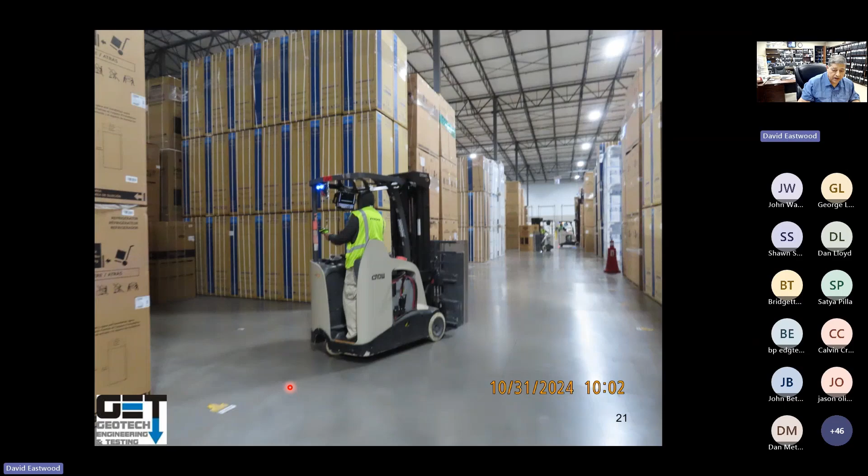But they have loading ramps in addition to their buildings and parking lots, truck wheel parking lots. They've got big parking facilities subject to 18-wheeler loading and a lot of heavy traffic. The interior of them, you've got all kinds of stuff in there - shelving, boxes, forklifts picking up heavy stuff and carrying it, running around.

Typical construction sequence: of course you do the earthwork, the mass grading, remove the grass, weeds and trees, root raking, take out all the roots, start grading it. If you're doing moisture conditioning, you go in there, add water to the soil as you put it back in, compact it to get it wet up to the optimum. That's how you do the moisture conditioning for these things.

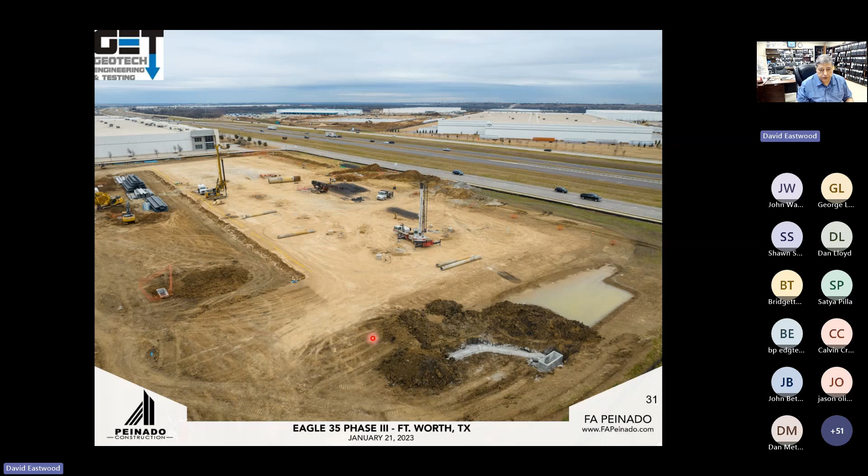You dig out the detention pond and put them on these pads, then go out there and start drilling your piers. You go out and start putting your slab together, put the steel and vapor barrier in after you build your pad. Then you start pouring your concrete in segments, pouring pour strips.

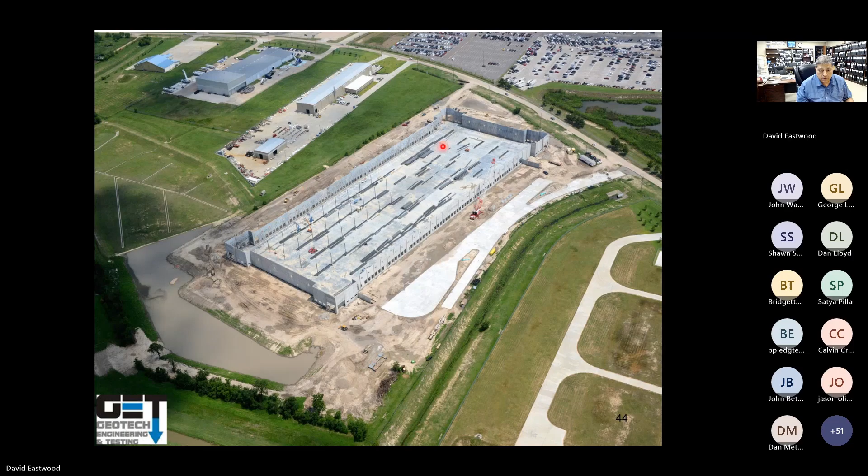Then you start forming your panels and getting your panels done. Then you start standing up the panels - you can see them standing up like that. Putting your columns in and your roof. Kind of how that goes. So, beautiful structures and very practical.

Design for paving. We do borings out there, typically for 1-story type structures in the Houston area. We do borings 25 feet deep for tilt wall buildings, if your soils are nice and strong. If they're bigger, multi-story type stuff, you'd go much deeper than that.

We use a truck mount rig, do the borings next to trees. Trees tell us the depth of the active zone by providing us with root fibers. Root fibers extend to the areas where there's no oxygen and water - that's where they die, and that kind of indicates the depth of our active zone. But that's not the movement active zone - they have an active zone and a movement active zone. Our active zone can be like 25 feet deep in Houston, but your movement active zone is only 10 feet.

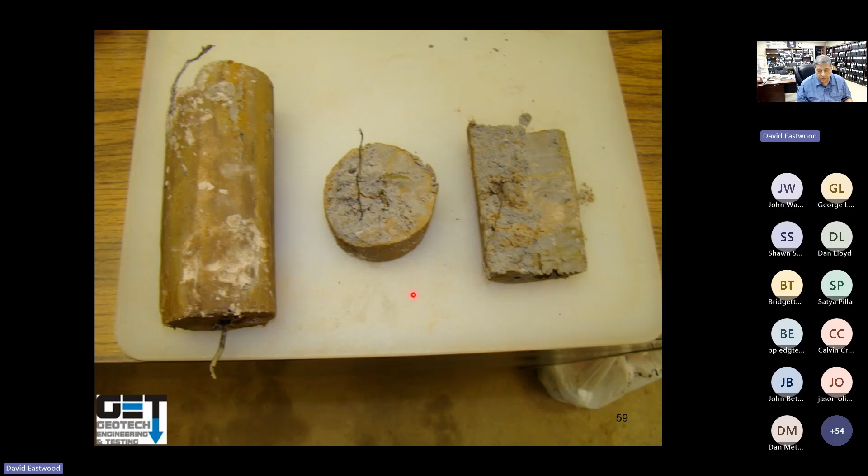These are root fibers - as you go deeper, they become smaller. You typically do one boring every 3,000 to 10,000 square feet, depending on the size of the building. Sometimes one every 20,000 square feet - if you've got a 1.2 million square foot building, you do less boring than that. In Houston, it's about 25 feet deep. In Dallas and San Antonio, you may have to go 35 feet deep.

Laboratory testing - you do all the standard testing, Atterberg limits. You put water in the soil and when it becomes liquid in this cup, you take a sample, put it in this cup, cut a groove through it with this thing, turn the handle 20 to 30 times.

When the groove comes close together, you take a sample of that. You get the wet weight of the soil. We want to know how much water is in the soil for it to behave liquid. You dry it up in the oven, get the dry weight of it, and get to measure how much water is in the soil. When it becomes liquid, you subtract the dry from wet.

Then run a plastic limit test. In this test, we take the soil, roll it to 1/8 of an inch. You get the wet weight of it, put it in the oven and dry it up. You want to know how much water is in the soil for it to behave semi-plastic.

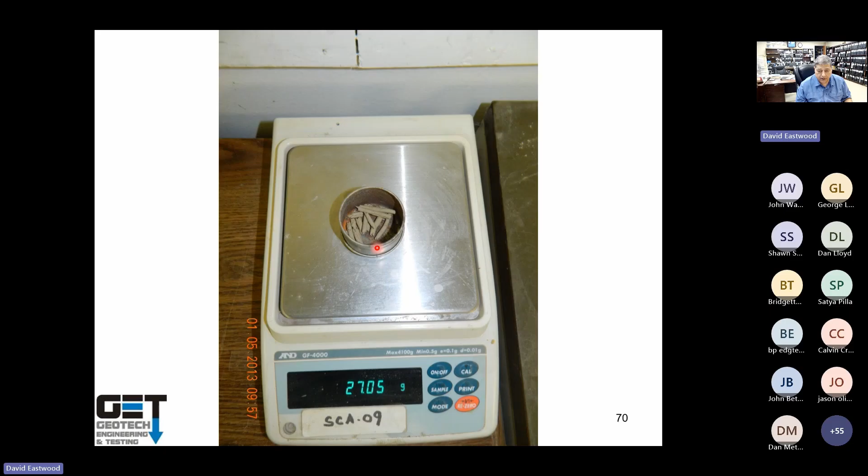When you subtract plastic limit from liquid limit, you get the plasticity index, or PI. If you've got a project with a PI less than 20, you've got low swell potential. Between 20 and 30, it's moderately expansive. Between 30 and 40, it's highly expansive. Above 40, very highly expansive.

A couple other tests we do in the lab: hand penetrometer and torvane. In a hand penetrometer, you push the hand penetrometer into the soil and you can read what kind of strength it has. In the torvane, you put it at the end of the sample and shear it in torsion, and you can read what kind of strength it has.

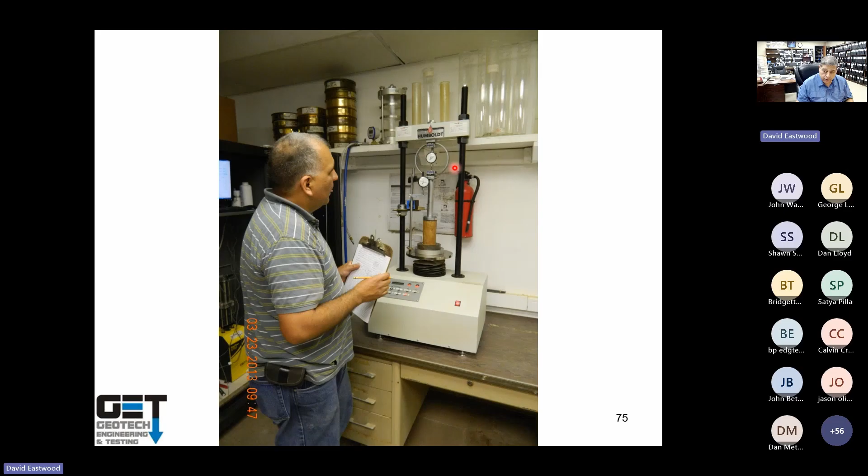You can also do an unconfined compression test. You can see the proving ring and the deflection, and you load up the soil to shear it, to see how much load it can carry. You use that for the design of your piers, spread footings, strip footings, or auger cast piles. Use this strength value for your foundation design.

One other test we do in the lab is called the swell test. You take a soil sample like this, put it in a ring, cut it and put it in this kind of assembly. This measures the deflection. You put load on it with this rack, equal to the geostatic stress, that's the load that's been in the ground. You add water to it.

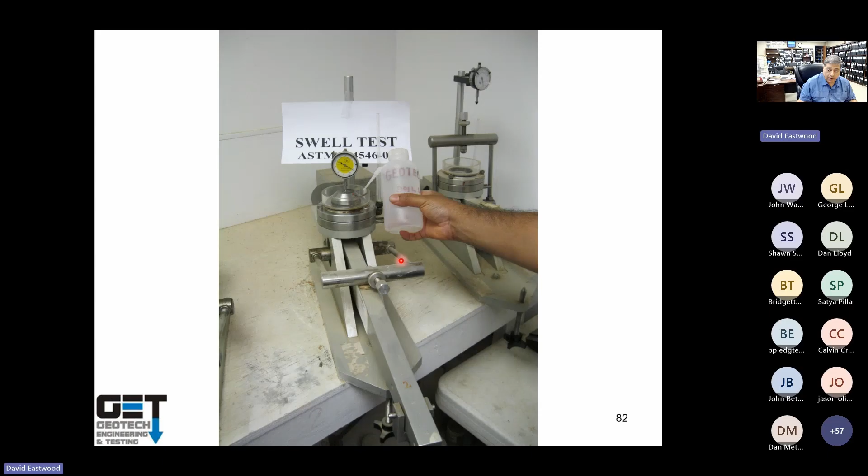And of course, you add the load. Basically, starting from the initial condition, initial void ratio or strain, you add water to it and your soil is going to swell. When it stops swelling, you add load to it to get back to the same void ratio or strain. That's basically your swell pressure, and this is the amount of swell you can have on your soil. It's called a swell test, using the ASTM method D4546.

You add water, you let it swell. Do the building pad. First thing you do is clear and grub, take out all the trees, make sure you take out all the roots. You've got to do root raking, pulling out all the roots and tree trunks.

All these areas have got to be demucked. You have to dig it out, remove the water and soft soils, replace them with on-site soils or structural fill, compacted in 8-inch lifts, and test it. Compact to 95% of standard proctor density. All this silty, sandy, soft soil has to come out — you cannot just push dirt into it.

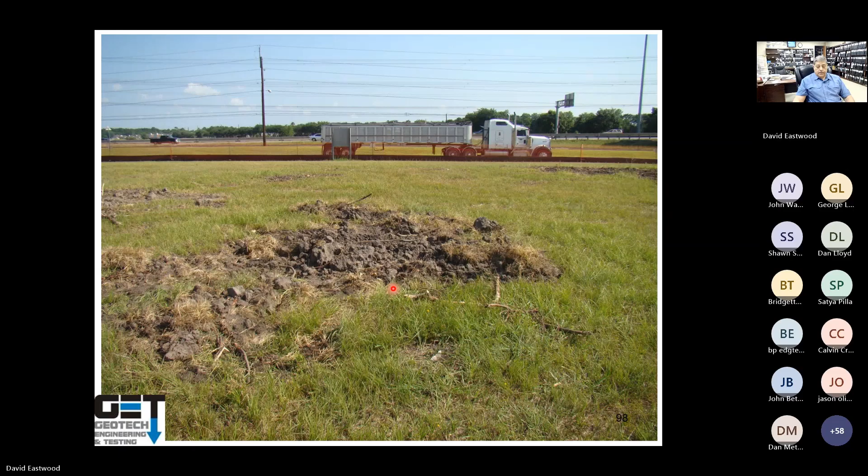None of these organics can be in there. No roots allowed in your pad. No roots, no organics, no tree trunks — all the organics have to be removed.

You proof roll the ground after removing the organics and stuff, using TxDOT Item 216. You take a loaded dump truck and go back and forth. We're not supposed to see any deflections here.

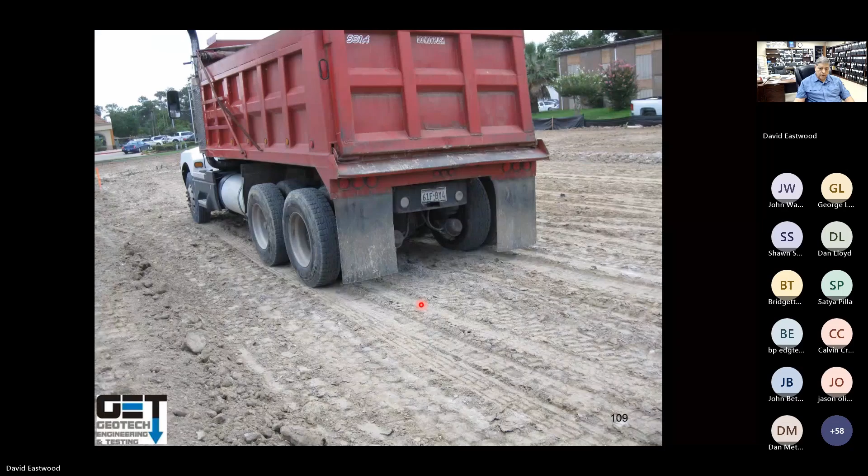No deflections. This is not acceptable, not acceptable. So you've got to dig it out, dry it up, and put it back in.

Floor slabs: we have alternative floor slab treatments. We present these alternative floor slab foundation treatments on the basis of risk, ranging from structural slab to slab on voids, slab on select fill, slab on moisture-conditioned soil, or slab on chemically or water-injected soils. So basically the floor slab treatment options are structural slab, slab on fill, slab on moisture-conditioned soils, or slab on chemically injected soils. Here's a structural slab system.

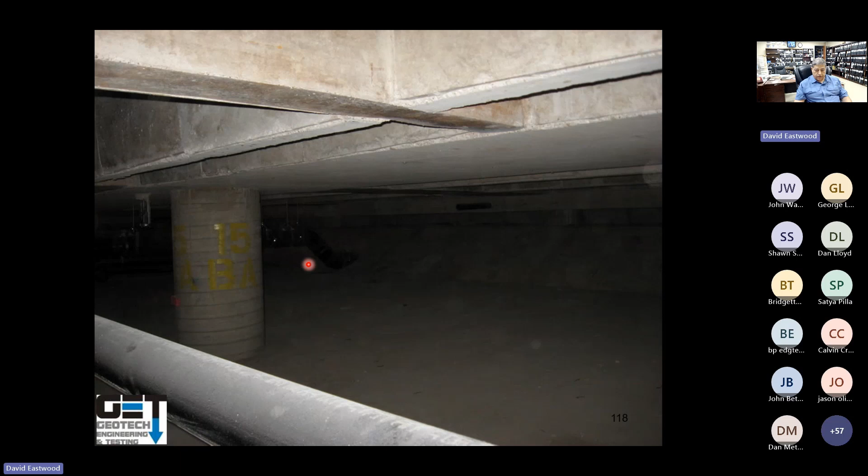You go in there, and of course you put your foundation in, and you have a structural slab. This is supported above grade, with a void underneath it — could be totally like a crawl space. That's for a big structure.

You can have a big project where you've got highly expansive soils. You don't want the slab in touch with the highly expansive soils, so you have this kind of crawl space looking thing, or you go put the Tiltwall building foundation slab on void boxes. These are cardboard void boxes.

The thickness of it is twice the amount of the PVR, or potential vertical rise, which I want to talk about in a minute. You've got to put void boxes in the grade beam as well as in the floor slab areas. So that's throughout the whole floor slabs and the grade beams.

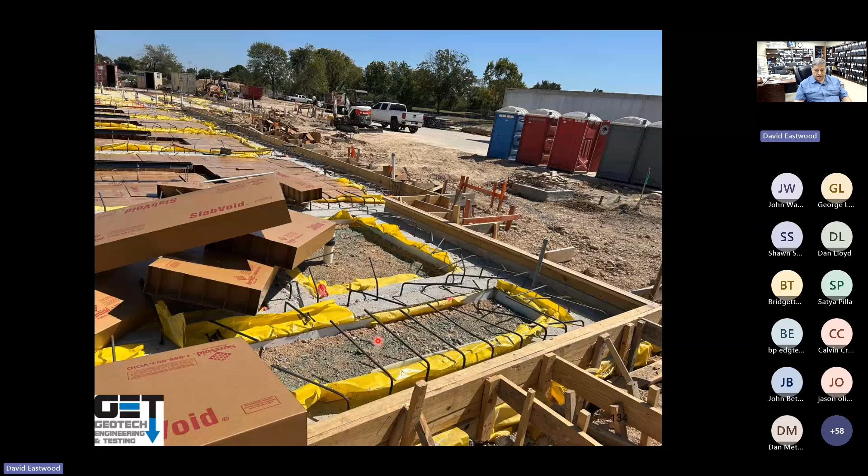You put this storm cover on top of the void boxes before you put the steel in, so that the steel doesn't punch through the void boxes. These are void boxes in the grade beams. You can see them with a storm cover on top.

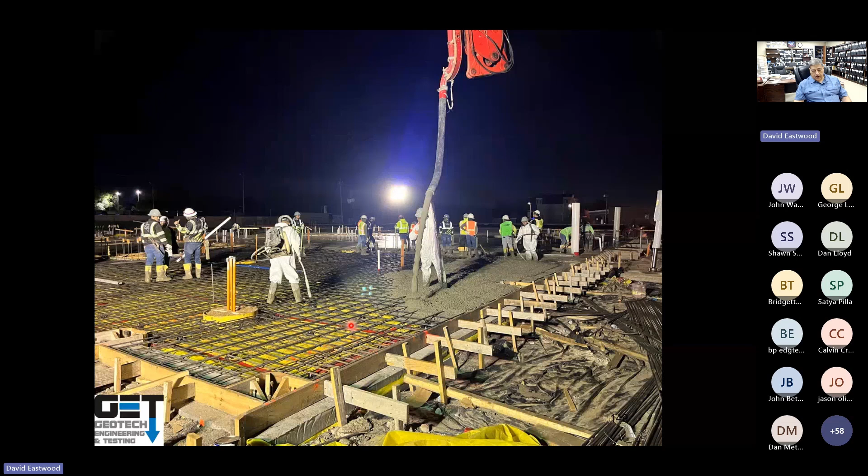For the vapor barrier, the steel, and this is the vapor barrier over the void boxes. Start pumping the concrete after you put the steel in.

And you pour the concrete for all the strip footings, or these are the void boxes here. More void boxes. Again, you've got void boxes in the grade beams as well, around the piers.

Yeah, the thickness of the void box is twice as much as the PVR.

Isolated plumbing from the expansive soils. In some parts of Texas, we've got such highly expansive soils, such as San Antonio, Austin, and Dallas area especially, you put your plumbing in certain type of void box type systems so that the expansive soil would not lift it and start pushing against your fixtures such as sinks and toilets. I had a case near Dallas where everything was moving up because the expansive soil was pushing against the plumbing.

Void boxes should be twice as much as the PVR. Potential vertical rise is the ability of a soil, expressed in inches, to swell, how much it can heave, shrink and swell, for a specific area.

It's the map I developed for Houston. For example, if you go out there and start building a Tiltwall building in Brookshire, your PVR is about 1 to 1.5 inches. Go out to Fulshear and it's 2 to 4 inches. You go out to Rosenberg, it's about 5 to 6 inches. You go to Greatwood out there, 6 to 7 inches.

You go to Pearland, it's about 5 to 6 inches. And League City can be as much as 8 inches. You go to Baytown, 4 or 5 to 6 inches. Crosby, 5 to 6 inches. You go out to Kingwood, depending where you are.

If you're near 59, you can have 3 to 4 inches of movement. You go near Lake Houston, PVR would drop to 1 inch. And inner city areas, out there at Westview, Bellaire, Tanglewood, you're going to have 4 or 5 inches of PVR.

So PVR for a Tiltwall building should be less than 1 inch for your floor slabs.

So if you've got highly expansive soils, you can remove the expansive soils and put it back with select fill. So if you've got a soil with a moisture active zone of 10 feet and a PI of 60, you've got to remove 7 feet of soil to get a PVR of 1 inch. That's exactly what happened — I did a Walmart out there near Dallas where they took out 7 feet of soil throughout the whole site and put select fill in there and built a Walmart.

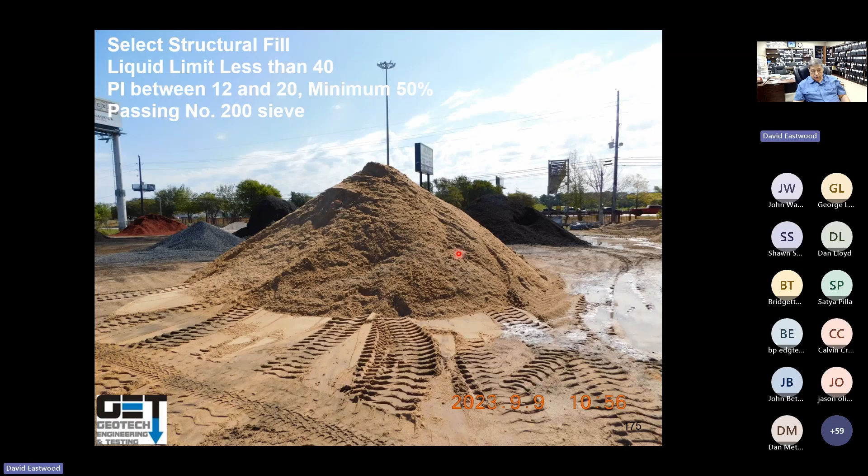Select structural fill, of course, is soil with liquid limit less than 40, PI between 12 and 20. This is the kind of soil you want to put underneath your floor slabs so that it does not heave.

Sometimes because of the elevations, you may have to dig a hole, start bringing select fill in there, and compact it with the sheep's foot, and bring it out of the ground. So if it's a dock-high building, you have to bring it all the way up. It's going to be your pad. You've got to cut it nice and vertical.

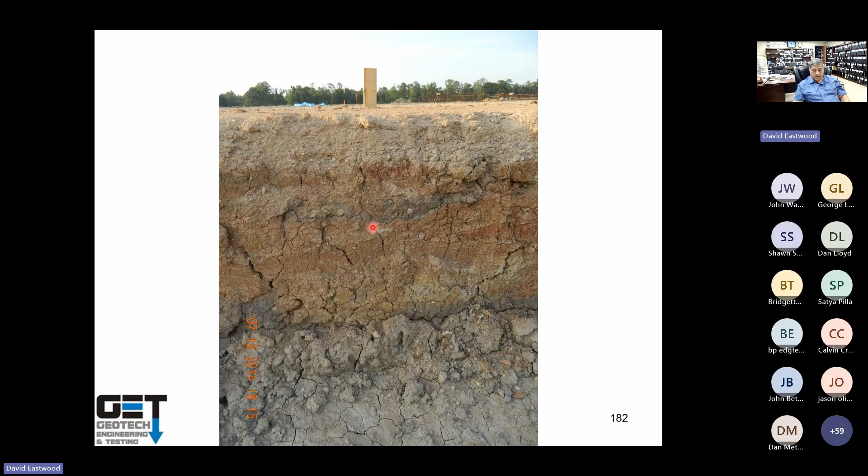Can't let it sit very long, otherwise it's going to go bad. This is your pad in here, really nice work. This is your select fill compacted. You compact it with a sheep's foot, you crown it, and you seal it with a steel drum roller.

So when it rains, water doesn't get in there — it will shed off of it. You seal it, so if you've got a Tiltwall building, this is your pad in here. You've got to run density tests every lift at 50-foot spacing, and make sure the density passes.

Slab with moisture conditioned soils. We see that a lot on projects where you dig out your detention pond and moisture condition that soil. You compact that soil at optimum plus 4%, in 8-inch lifts. You got to keep that moisture constant. If you let it sit dry in the middle of summer, you're going to lose it and your slab's going to heave. That's happened to a lot of people I've seen. I was just looking at four tilt-wall buildings in the Dallas-Fort Worth area where they did moisture conditioning, but by the time they poured the slab, they had lost all that moisture and the slab started moving.

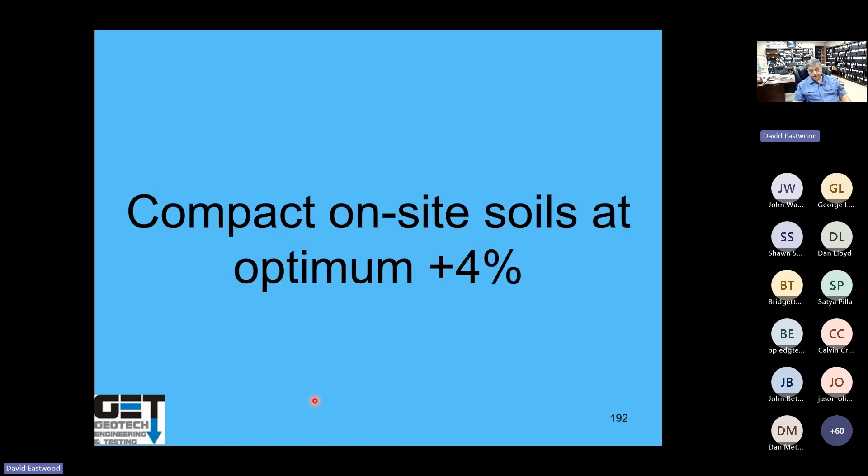So you dig a detention pond, and as you dig the pond, you bring in soil and try to build your pad. You add water to it, keep it wet, and compact it with a sheep's foot. Cover the area after you moisture condition it—I'd say within 7 days—with plastic sheeting, because you're going to lose moisture otherwise. So you got to cover it up, otherwise you lose it, and if you lose it, your moisture conditioning doesn't work anymore.

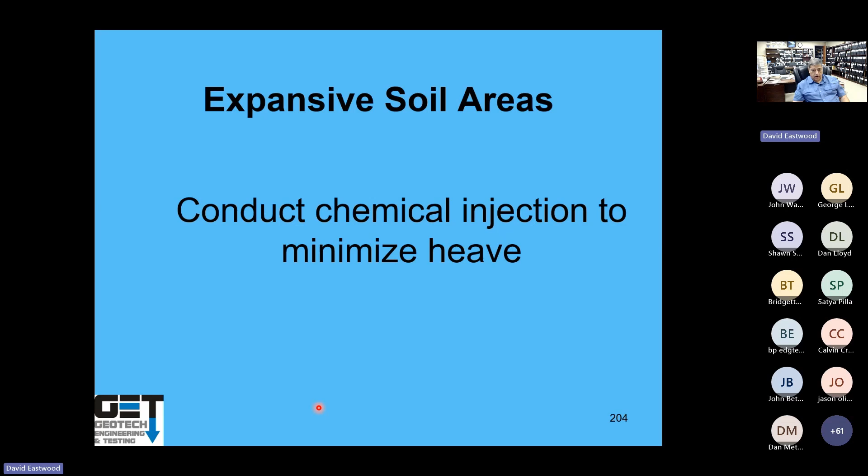Chemical injection—again, if you've got expansive soils, you do chemical injection. That's another option. Basically, clay particles have a negative charge, and water has a positive charge. You do what's called cation exchange: you reduce the negative charge by adding chemicals such as light grade sulfuric acid, which makes these negative charges go away so it doesn't heave as much. So basically, chemical injection removes the monovalent cations such as sodium and potassium and replaces them with divalent cations like calcium.

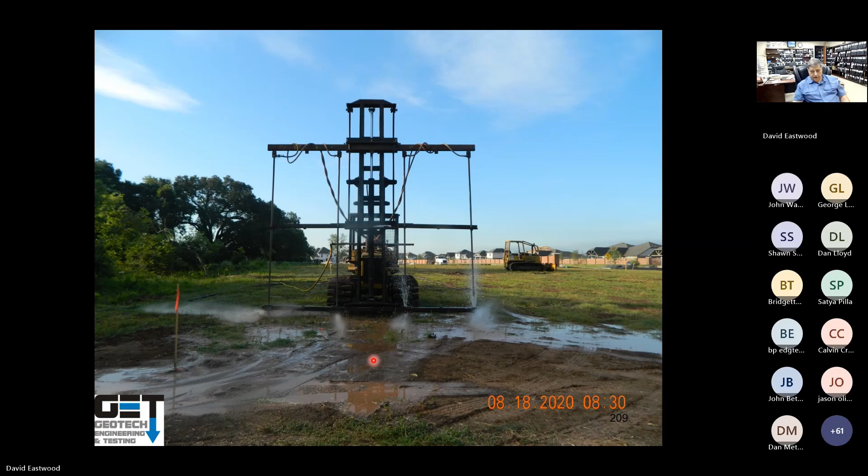So you get the chemicals in this tank and inject it. This is a Sienna Plantation site, injected to a depth of 10 feet in Houston, and 15 feet in Dallas, San Antonio, and Austin. Inject at 24-inch spacing usually. These chemicals go all the way down to a depth of 10 feet. Inject it.

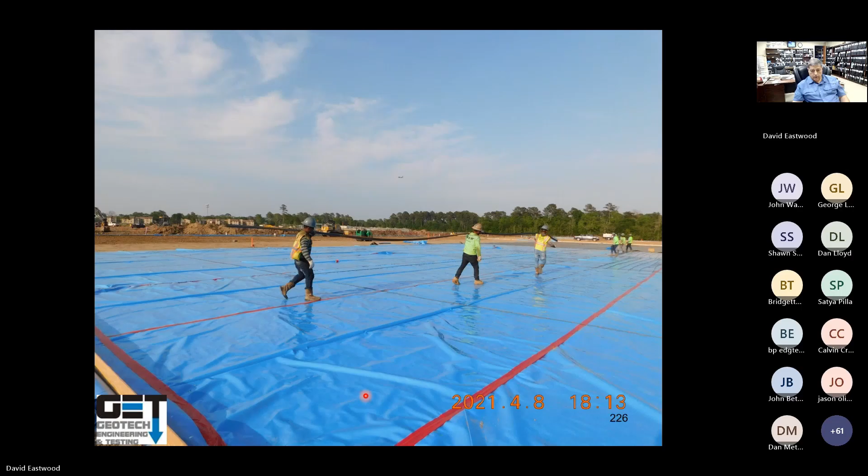Vapor barriers—we recommend something like a 10 to 15 mil vapor barrier. You put it on top of your pad, then put your steel in. Use a 15 mil barrier. Drainage—got to make sure you have positive drainage around your building. We don't want water near your building. You get a 5% slope in the grass, 2% in the concrete.

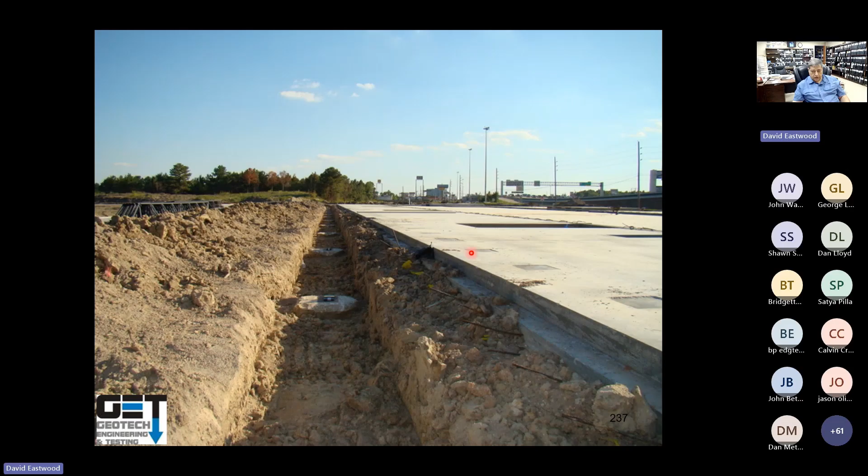When you pour your slab and stuff, you basically have a slab closure strip area. This is your regular slab that you pour. You've got a space between your piers where your panel is going to go, and the slab has a closure strip. You can see it here—your piers going over here, that's the space, and your panels going up in here. You've got the steel from the panels coming in, down into your slab. You pour your closure strip. See, the steel from the panels extends out like this—that kind of keeps your panels together and gives the whole building stability.

All these soils in your closure strips have to have the soft stuff removed and be compacted in lifts all the way to the top, 95% standard Proctor density. You've got to compact all this, put your vapor barrier in, and then compact it. You cannot have soft soils in here, otherwise it's going to settle.

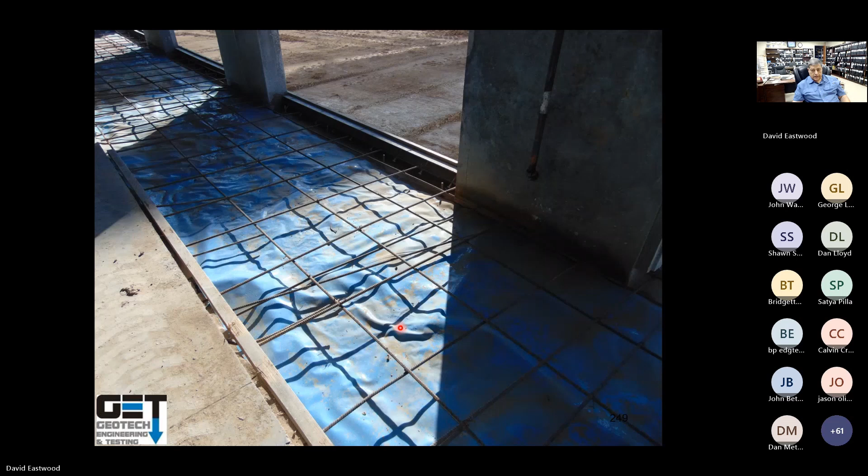So you've got the steel coming in, connecting to your panels. Concrete coming over here. You've got your steel, you've got your vapor barrier, you pour your concrete, your closure strip.

The soil underneath it has got to be good, nice and hard. If you don't compact it, it's going to settle. Here's your closure strip that's settled, right here too—they had to jackhammer it. In this case, they went back in, put cement and stabilized sand, put the steel in, and poured it back in.

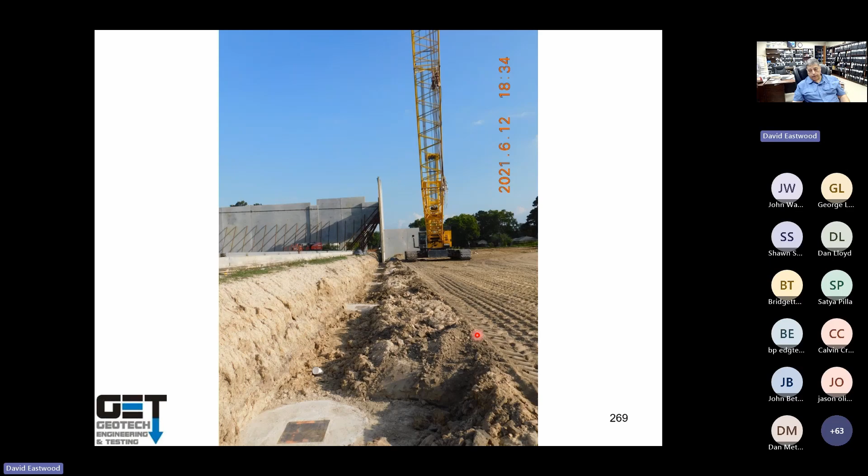Floor slab loading: typical shelf loading is 150 to 200 pounds per square foot. Your column loading and the perimeter loading comes from the tilt wall panels and stuff. You've got a service load, usually about 175 kips. Factored load for factor of safety, you can use 215 kips.

Interior column loading: 100 kips. With the factor it's 150, so you've got a 1.5 factor in there.

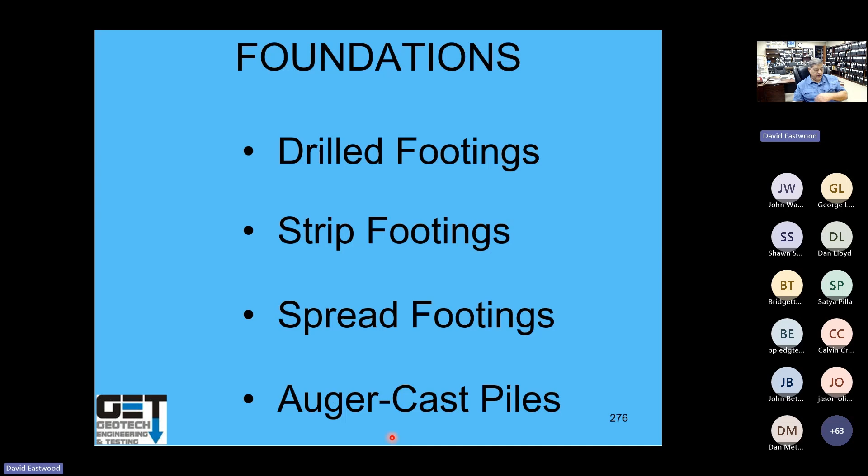The kind of foundation you use is drill piers, strip footings, spread footings, auger cast piles. That's typically what we do. If you've got expansive soils, you use a drill pier foundation system here.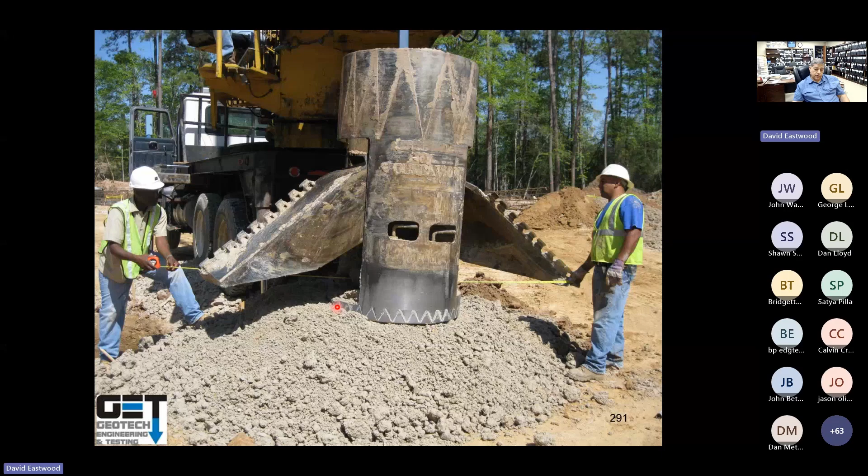You make a bell for this thing. With heavy loads, you open up your reamer, and you make sure it opens up properly. You have to measure it as part of your observation in the field. Make sure your drill piers are clean, with no loose materials, and no more than 3 inches of water in it.

You put your steel cage in it, then start pouring concrete, making sure it doesn't hit the sides.

The way you determine your pier depths is scientific. Here's some concepts - this is your pier depth all the way down here. You've got basically an active zone depth, which is calculated several ways.

When you hit a sand layer, you hit the active zone depth. When you hit a rock layer, that's your active zone - 2 feet below the lowest root fiber. When the change in suction is less than 0.27 pF, when your liquidity index becomes vertical, the depth of slickensides, and when you know the historical water table.

Soil suction - we do that as a test in the lab, basically as to the free energy state of the soil. Soil suction is described as the ability of an unsaturated soil to attract or retain water, in terms of pressure. The pF is expressed as log base 10 of the height in centimeters of the water column that the suction would support.

So you've got basically your active zone, but that's not the movement active zone - that's just the moisture active zone. Then there's this thing called the zero movement line, or movement active zone. That's about 10 feet in Houston, and Dallas, San Antonio, Austin is about 12 to 15 feet.

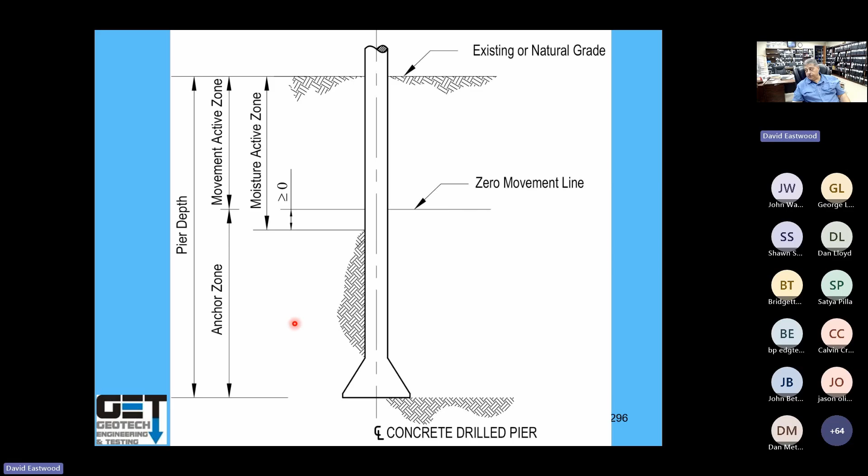Then you've got to anchor that pier below that to resist uplift from the expansive soils - that's the anchor zone. You don't count on the bell to resist uplift, because by the time the bell gets engaged, the panel has already moved 2-3 inches up. So you don't count on the bell to resist uplift.

Where you've got a tree, of course, the active zone depth is deeper. So you have to check your pier depth for compression loading - yes, end bearing, and of course skin friction for compression. You've got to make sure you've got proper bearing capacity there.

And of course you've got to resist uplift. You've got skin friction above the zero movement line that you have to counter with the anchoring depth. You don't count on the bell to resist uplift.

So that's how you determine your pier depths. If your zero movement line, or movement active zone, is 10 feet, your actual pier depth is twice as much as that - it'd be 20 feet. That's how you determine it.

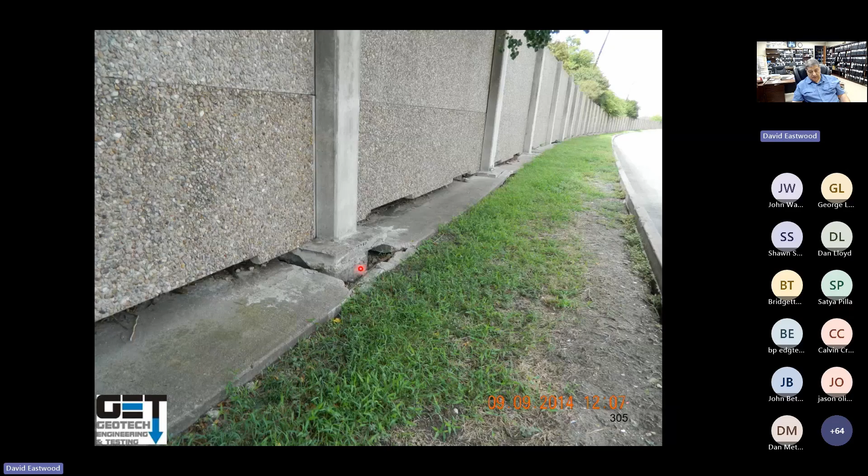These are some panels out there near Pearland - sound walls sitting on piers - and you see expansive soils grab the piers and push them up. So your piers have got to be deep enough to resist uplift.

There's a procedure by the Foundation Performance Association that you can download if you're a member of FPA, and you go through a calculation. You put your soil layer information in, your suction levels and loading, and you can check your piers against uplift, in this case, and of course downward movement, and make sure it meets that.

A connection between the drilled footings and panels - a lot of times some of the structural engineers say, 'Oh, we need to have a good connection.' Maybe have steel between the piers and the foundation and the panels.

I don't see that. Basically, we see a steel plate where your piers are, and you put your column, your tilt wall panels directly on top of it. It's kind of like a friction connection - the panels sit on top of the piers. These are the piers.

Sometimes I see these little guided steel plates in here, and they're bolted to the top of the pier. You've got to make sure your panel sits in the right place, like that. So the panel sits there, and they're bolted.

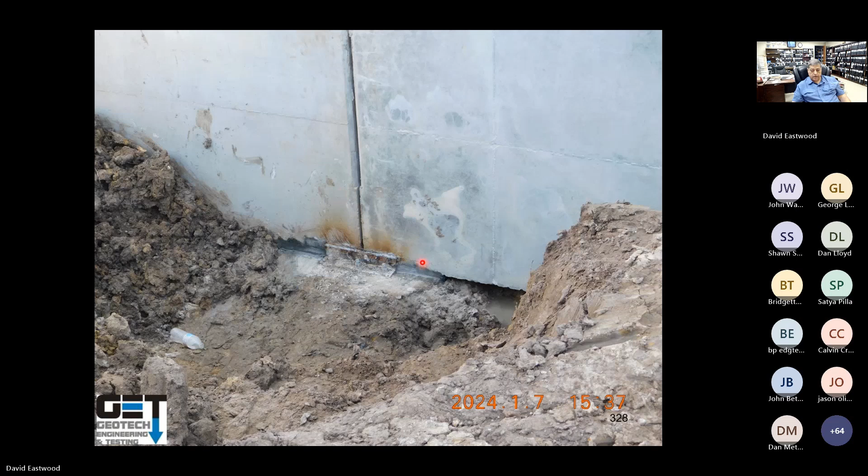See that? These are connections between the pier or spread footing or strip footing and the panels. But we don't have steel from the piers going into the panels. That's just, we see the connections there. There's no connection between the drill piers and the panels.

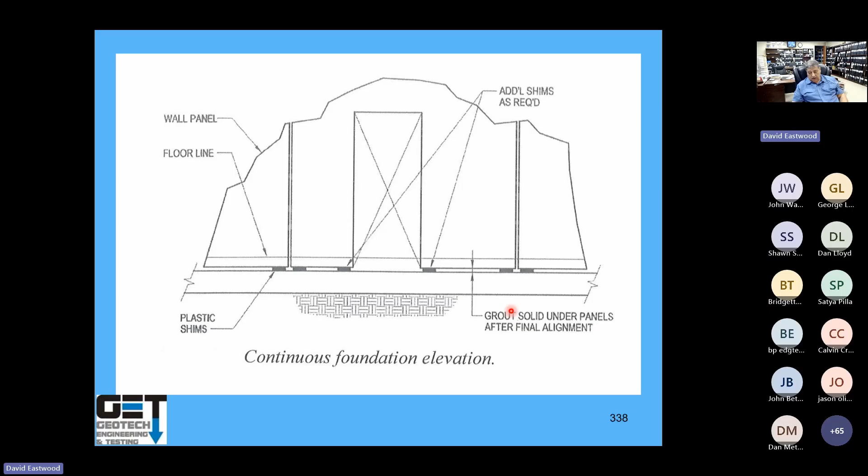Here's a strip footing foundation. If your soils are non-expansive, you would use strip footing. These are your panels out here. You have to grout underneath the panels, otherwise it's going to settle. So as soon as you put your panels on top of the strip footing, you got to grout this area here.

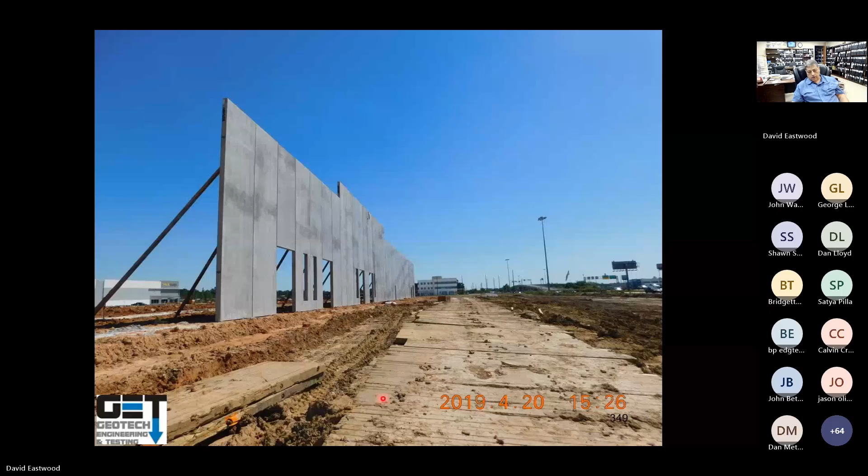You line up your panels, put them on top of the strip footings. There's no connection between the strip footings and tilt wall panels. Once the panels are set and aligned, the space between the footing and the panels should be grouted, otherwise you have settlement problems. That's the grout right there.

Like that, precast panels. Some of these projects, they don't pour the panel right there. They just bring in the panels, precast panels. They line them up like that on top of the strip footing or spread footing.

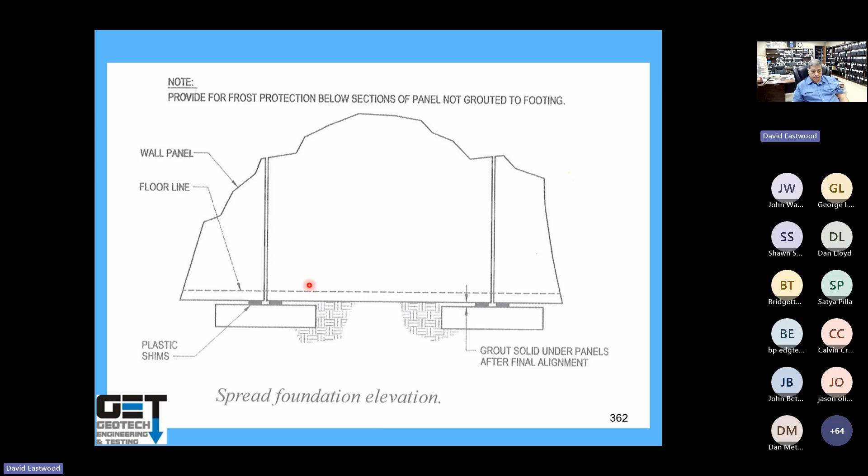Spread footing foundations on non-expansive soils. Again, this is your spread footings, your panels sit on top of that. You dig your spread footings, put steel in it, pour concrete. There's no connection between the spread footing and tilt wall panels. You set the panels directly on top of the spread footings.

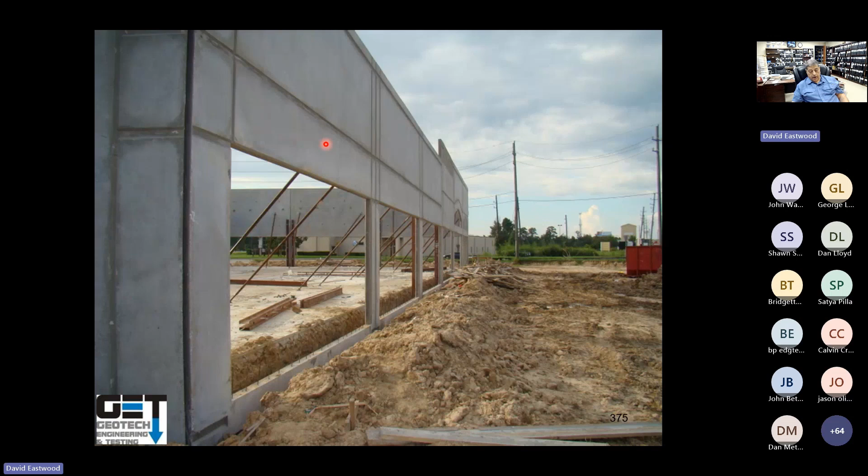Like that, there's the gap between the panels. That's your spread footings, that's the corner. And you put the panels on top of it. You do the bracing.

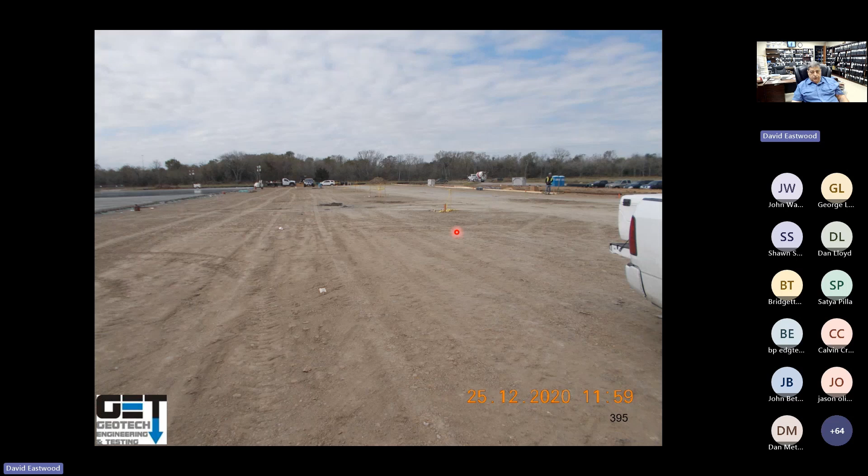Floor slabs, concrete placement. Once you compact your pad, you go in there and make sure it's nice and compact. Got to be proof rolled. Density test every 50 feet or so. You got to set your forms, put in your steel and vapor barrier, start pumping the concrete in.

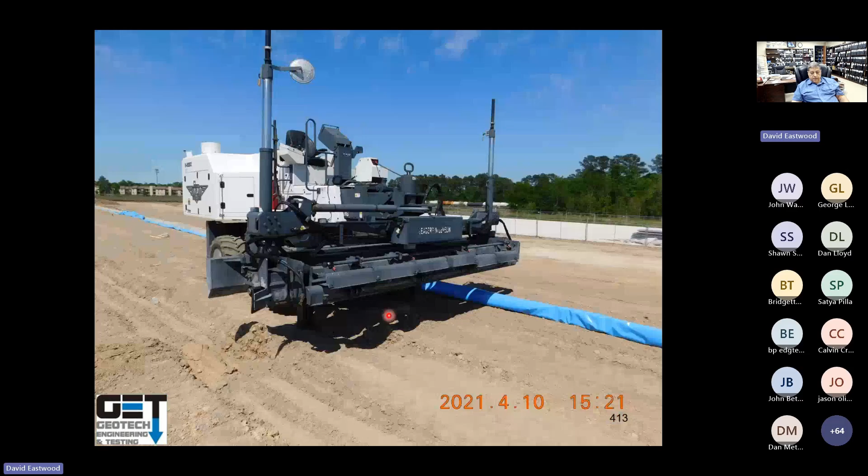You got a concrete, hopefully slump no more than 4 inches. You vibrate it, make sure there's no voids in there. You can use laser guided screed for horizontal concrete placement. This device really does a nice job of finishing for your parking lot as well as your floor slabs.

You use that on a lot of projects nowadays for concrete placements.

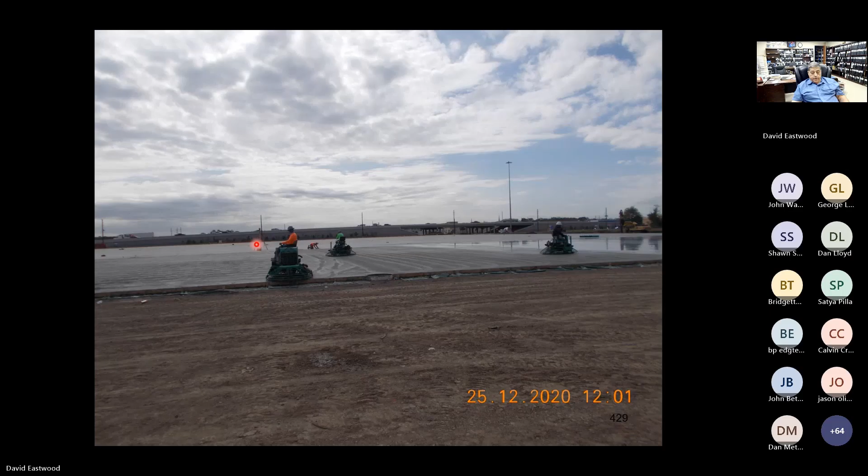You go on there, trowel it. Keep your surface of concrete from rapidly drying. That's you got to do a curing compound. Make sure we don't have loss of moisture, otherwise you're going to get curling.

So the way you do the curing, basically it starts immediately after the final trowel. Cover the concrete with a membrane or spray with a liquid curing compound. I see that the spray is what's used most of the time. I mean, you can put blankets like that on, or plastic sheeting, or you got to do the spray. Do a lot of spray.

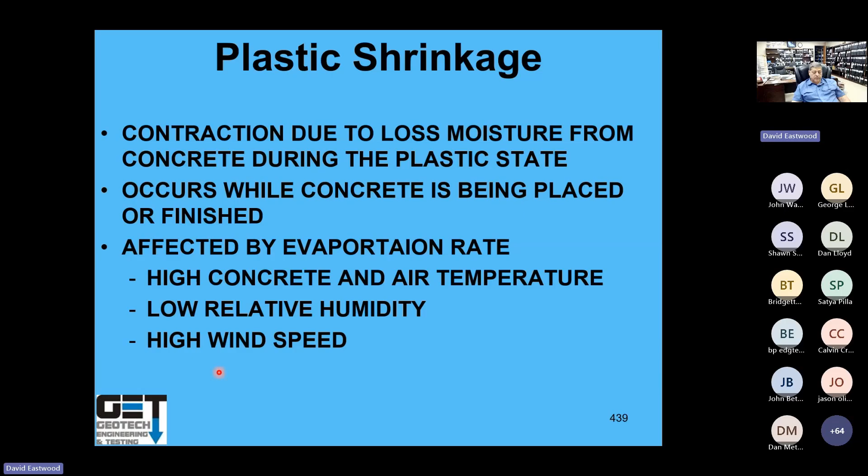Got the whole thing got to be pretty white and keep that moisture in, otherwise you're going to get curling or develop plastic shrinkage. Basic contraction due to loss of moisture from concrete during the plastic state occurs as concrete is being placed or finished, affected by evaporation rate, high concrete and air temperature, and low relative humidity and high wind speed. You develop shrinkage cracks.

So once you pour that slab, you got to go in there, put control joints, I don't know, 6 to 12 hours or 6 to 18 hours after the pour. You saw cut it a quarter of the slab thickness. So if your slab is 6 inches, you do a saw cut 1.5 inches deep. You put them at 15-foot spacing, not 25 foot, not 20 foot, 15 foot.

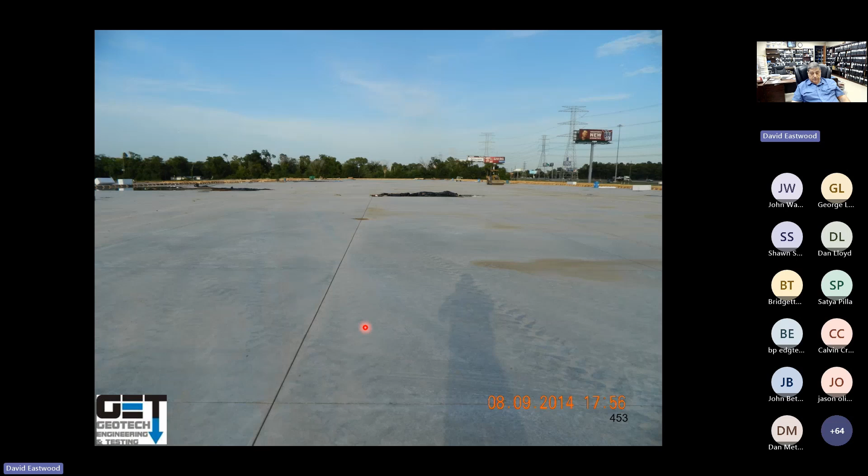You saw cut it, and it tells the concrete where to crack. You go 1/4 of the concrete thickness where your saw cut goes.

This is the control joints. You want to keep them at 15-foot spacing. You saw cut it 1/4 of the slab thickness, and it cracks directly underneath it, so you don't develop a bunch of shrinkage cracks.

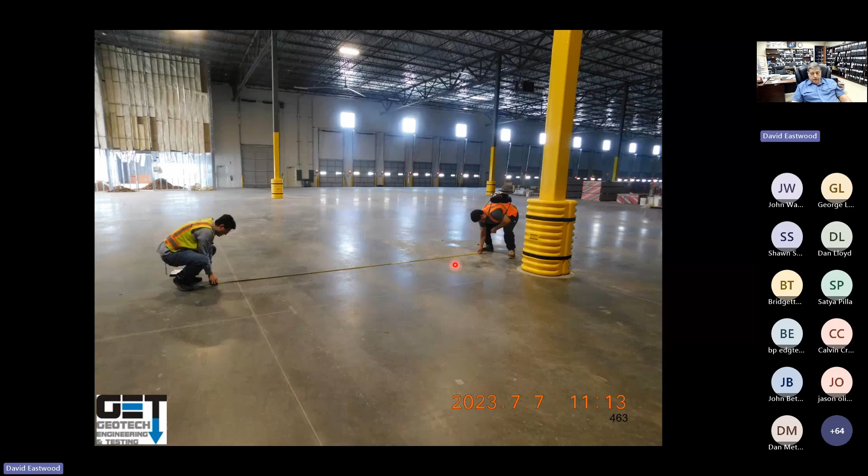It's kind of a finished floor in here. You can see control joints in your store. The spacing between the control joints should not exceed 15 feet. This distance should not exceed 15 feet. We see a lot of these slabs with 25-foot control joints. It's not acceptable.

The control joints, expansion or construction joints, like that. You got steel going in there, the dowel. That's your expansion joints.

Curling is caused by a rapid drying of the upper half of the slab. The upper half of the slab shrinks more than the lower, and this is therefore causing the corner to lift. So you get curling due to fast curing of that concrete in the upper section of it.

So you got to be careful. As soon as you pour that concrete, put the curing compound on it. That way you reduce the potential for curling. The steel should be in the top 1/3 of the slab, or at least half of the slab, and the thicker the slab is, the less potential for curling. That's the curling, what happens on your joints.

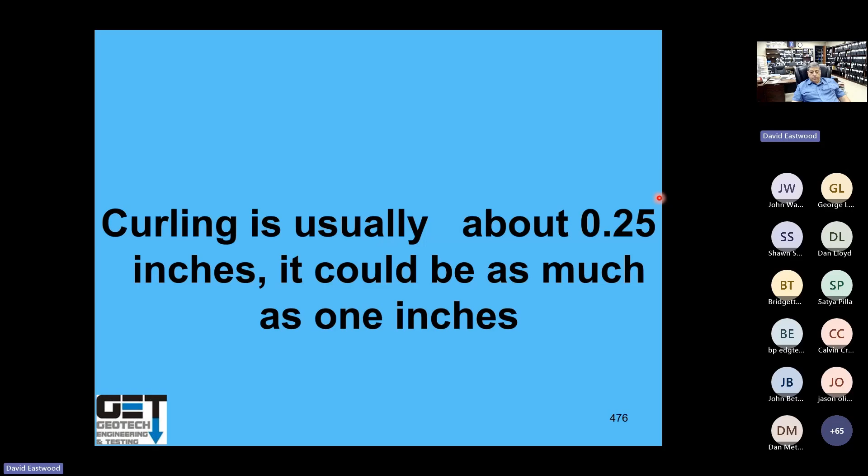You develop voids underneath the concrete as the concrete lifts up like that. Curling usually is about 0.25 inches, but it could be as much as 1 inch of curling.

Here's a typical slab out there we're looking at, a project in Arizona. We saw the curling out here. Put a 4-foot level on it, and you can see it's not level.

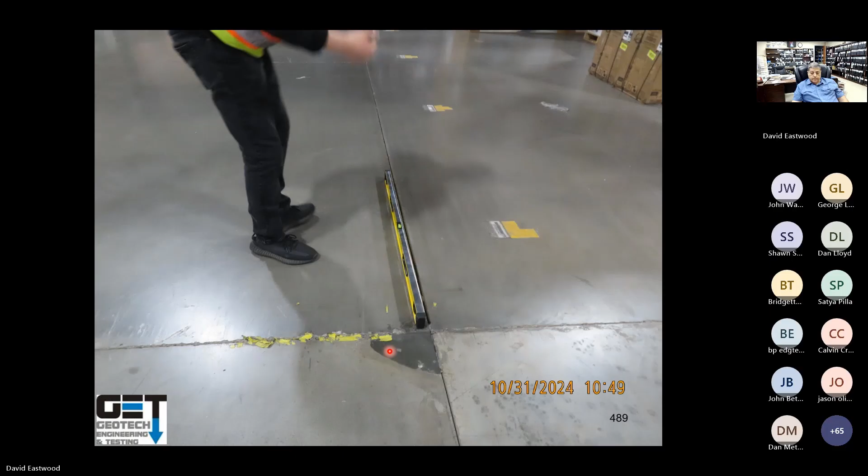See it near the joints. There's curling going on. Some of the joints, because of the forklifts, start going bad from the wear and tear on them. You can see the space, that's the curling space. These are the joints opening up. You can see the curling here, and you can see the forklift going through it and making that noise. You hear that? Boom, boom, boom, boom.

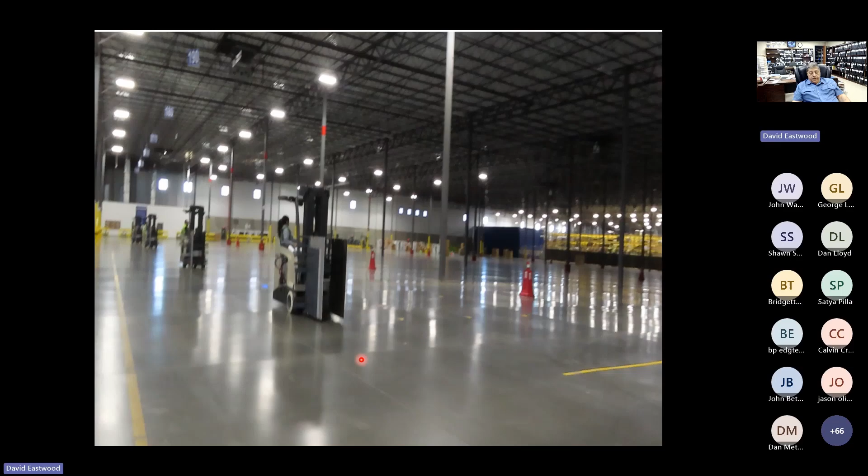So as the forklift goes through it, it makes a noise. There's a void underneath the slab, it's coming up, curling up. So you got to go in there and inject it. You could use polyurethane or other type of material, inject it to fill that void, and then you're going to have to basically grind the top of it to make it level.

So how to basically reduce curling: use a thicker slab, cure the concrete well, make sure you cure it right away, keep control joints close together, use a slump of 4 inches or less, and put the steel in the top 1/3 of the slab.

Floor slab construction after raising up the Tiltwall panels. If you want to control the temperature and the rain and stuff like that, you can set up your panels, lift them up, but you don't pour your slab. You put your braces in, put your roof in, cover it up, and basically seal your slab. There's no rain, you don't have to worry about that, sun and all that stuff.

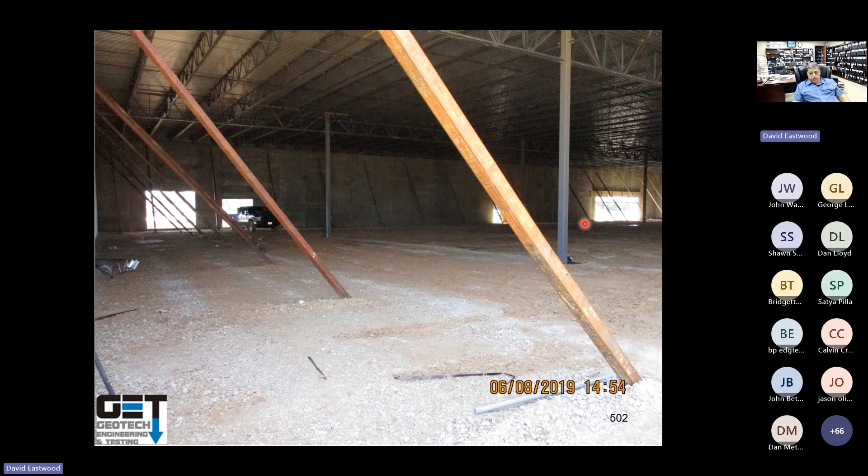You remove your braces, and compacted soil, of course, is your pad. You pour your slab, there's no closure strip, it's nice and clean. So you don't have to pour your slab first, but you can pour it after you set your columns in and put your roof in, and after you set up all your panels.

So columns, of course, you set them in. You're going to have joints, sometimes diamond shape. Contractors have a hard time coming up with a diamond shape type deal. Most of them are going circular nowadays.

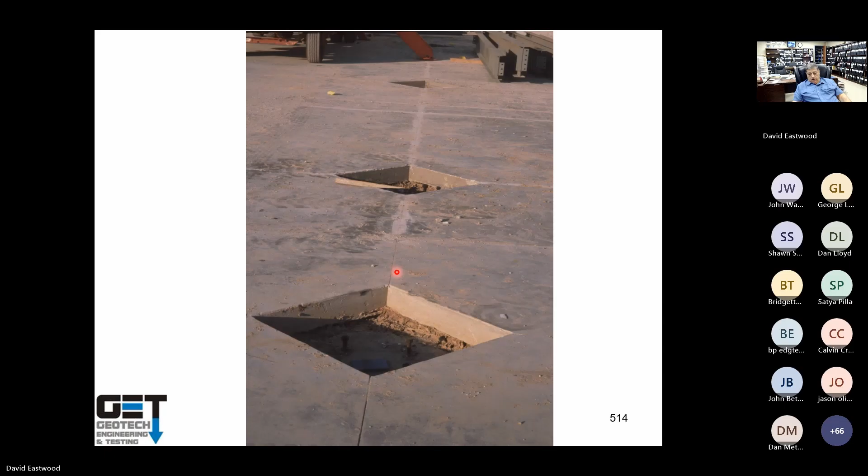You got your anchor bolts for your columns. That's an isolation joint between your slab and your columns. That's the top of your piers. See that? A lot of people are going with a round cardboard type joint.

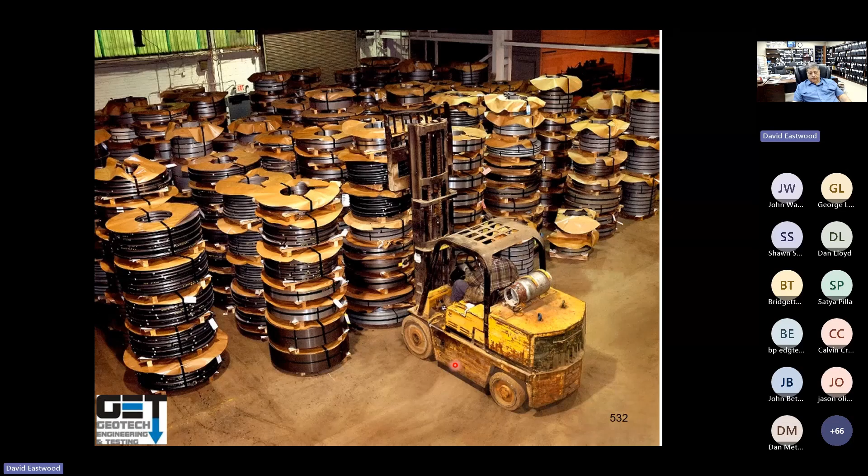Floor slab loading. You go inside some of these Tiltwall buildings, they got all these shelves out there loaded up, all kinds of loads, and they got forklifts going all over the place with boxes. Heavy industrial loading with the forklifts. Heavy loads like that could be sitting in there, 3,000 PSF loading on the floor slabs.

Panels - once you pour your slab, you set the forms for your panels. You got to put a bond breaker between the bottom of the panels and your floor slabs. You put your steel in, you put in chairs between the steel and the concrete slab, pour your concrete, your panels, and vibrate them.

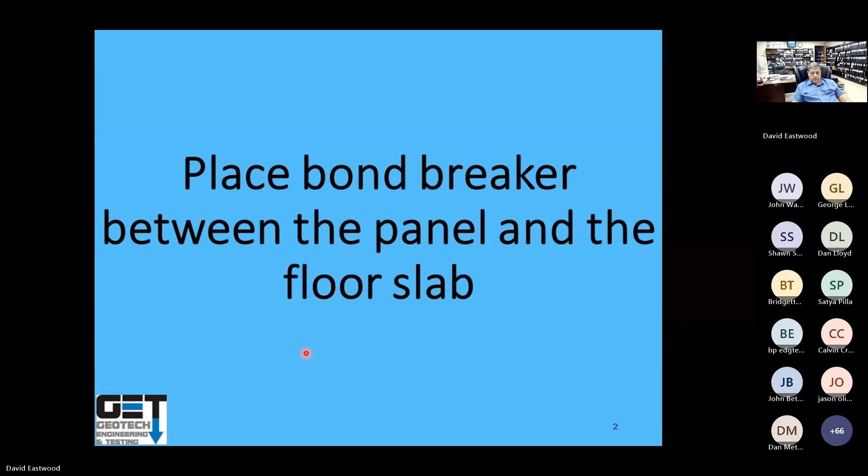Once your concrete hits a certain strength, you start lifting your panels, usually within 7 days. Sometimes you get early strength concrete, you pick it up within 3 days. You finish it, trowel it, place a bond breaker between the panel and the floor slabs. You got to put a bond breaker here. A lot of times you do the spray kind, and you got to wash it off, from what I understand.

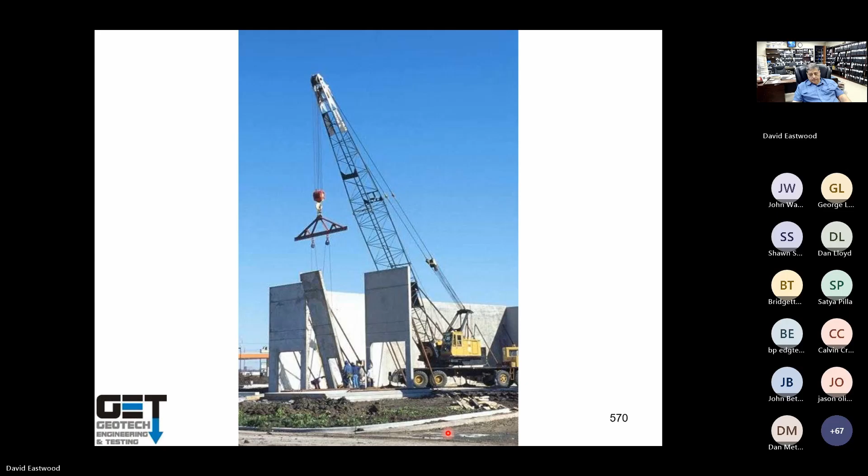Once your panels are ready, which is usually about 7 inches thick, the Tiltwall panels, start lifting them with a crane. I don't like the crane inside the building when you lift them - those outriggers put a lot of stress on the floor slabs. You do it from the outside on soils. You lift them up, you stand them up, put in the braces. These outriggers are going to put a lot of stress on concrete unless they're designed for it. We don't recommend placement of the outriggers on the concrete.

Let's see, let's see any questions in here. I got some questions.

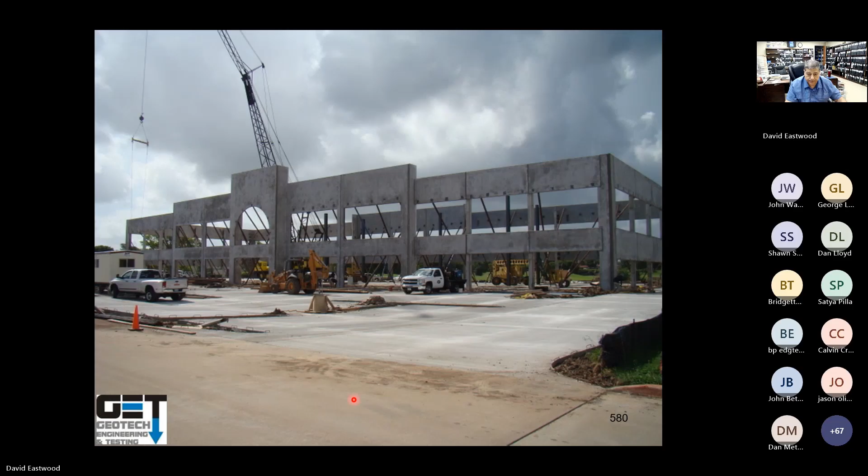So the outriggers put a lot of stress on concrete. There's this guy over here - they're putting the crane inside the building, and you start lifting the panels. These are the outriggers. Again, in here you got the crane inside the building. Do not put cranes on the slab or paving unless it's designed for it.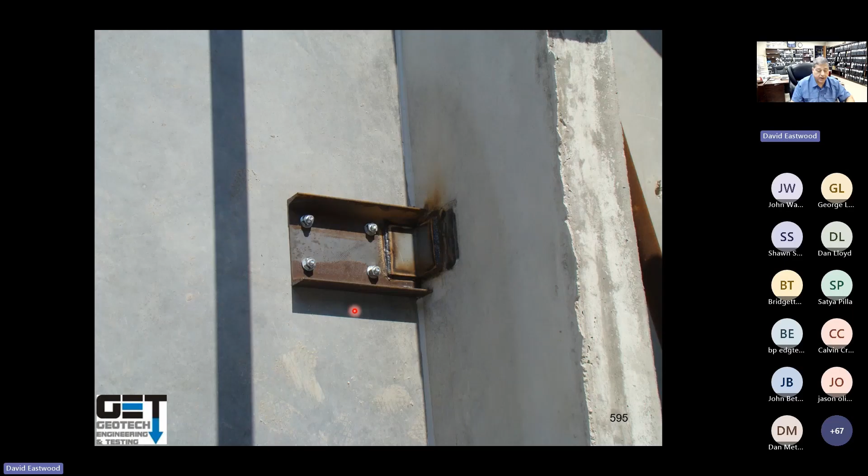Tiltwall panel separation - you can see the separation in here, you got voids in here, you put joint filler in it, in the panels. Connections: some structural engineers like to put in connections between the panels to keep them together. They kind of bolt them in with steel plates like that. Some people don't - they just put them on top of the piers and then connect them at the roof. So these are some of the steel plate connections.

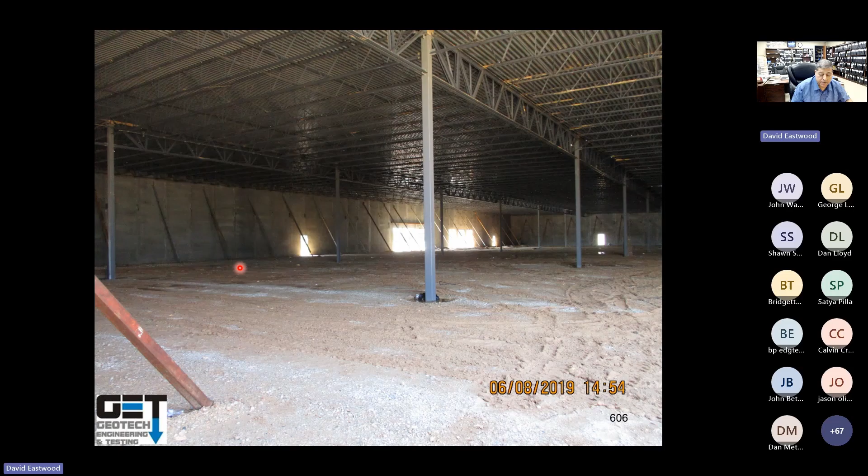Wall bracing. When you lift up your panel, you need bracing. They're anchored on the bottom here and the top, it's screwed in there. When you don't have a slab, you're going to have to anchor them on the bottom in the soil, right here at the top. See more bracing - it's screwed right there, and then the bottom screwed right here.

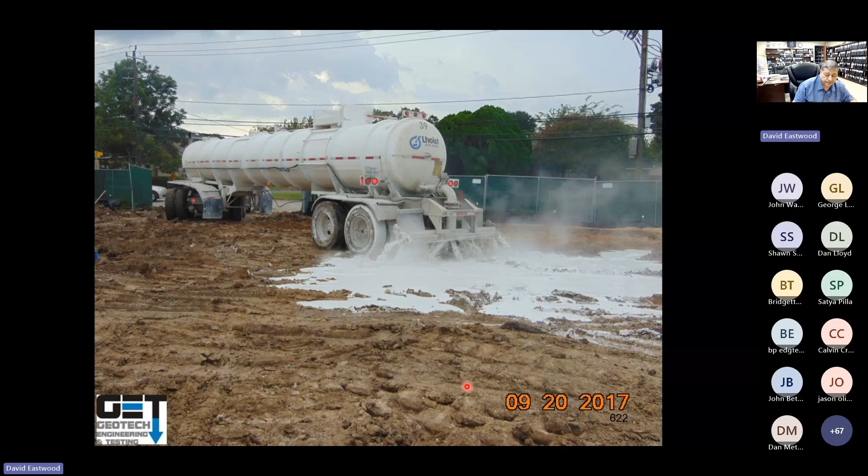You remove grass and stuff like that, you bring in your lime, start spreading it, start mixing it, add water if you need to. Let it hydrate to break down that clay. Cure 24 to 72 hours to obtain optimum hydration, then you pulverize it.

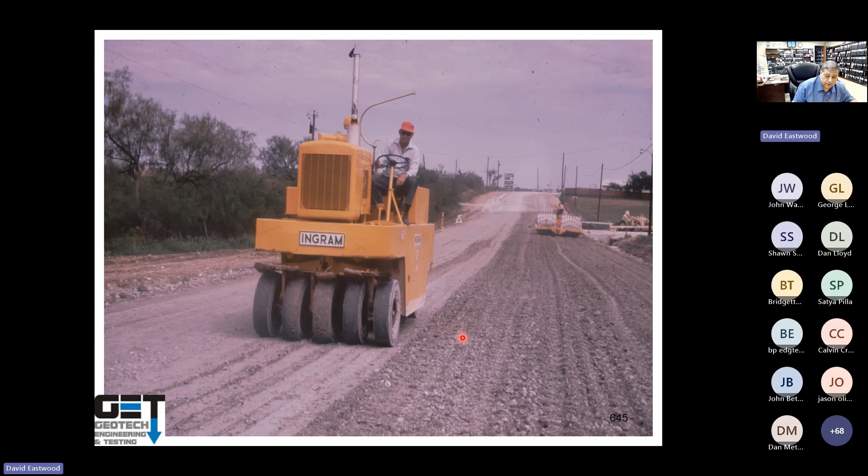That's your original clay - after you lime it and pulverize it, it becomes like a granule material. So you get samples of that, run it through sieves - these are the sieves, make sure it meets the gradation. After you pulverize it, compact with a sheep's foot, then you seal it with a pneumatic roller. That's your sheep's foot compacting, and you seal it so water doesn't get into the soil - that's why you seal it. It's a pneumatic roller.

Compaction, you run a density test every 50 feet with a nuclear gauge. Density, you do depth check every 50 feet for lime stabilization using phenolphthalein, and gradation every 50 feet.

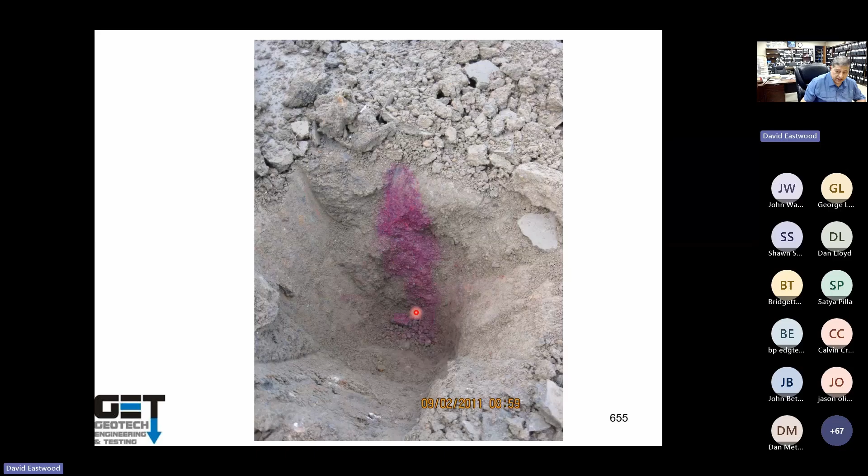Depth check, you just dig a hole and spray phenolphthalein in there. It turns purple, telling you the depth of stabilization. So if your stabilization is supposed to be 8 inches, you don't want it to go 10 inches. That means you used lime at a deeper depth, so you don't have as much lime concentrated in there. That fails. You got to make sure your depth of stabilization is not exceeding what the specs call for. So if the specs call for 8 inches of stabilization, this thing should not turn purple below 8 inches.

So you check it. After your lime stabilization, you put your steel in. You don't want to have these shrinkage cracks - that's too dry. Once you put your steel in there, you got to pour that concrete right away. If you develop shrinkage cracks like that, you're going to have to remove that steel, add water to the soil, and put it back in. These are too dry, not acceptable. That's why you get a bunch of cracks in your concrete.

The way you do mixes for lime stabilization, you add enough lime to get your PI less than 20, or use Eades and Grim. You want to have your lime stabilized soils at a pH of 12.4. This is a better system, you run a pH test. This is the amount of lime you add, and that's your pH. Once you get about 12.4, you need about 6% lime in here. I usually add 1% to it because of the waste and stuff, so if you need 6%, I specify 7%.

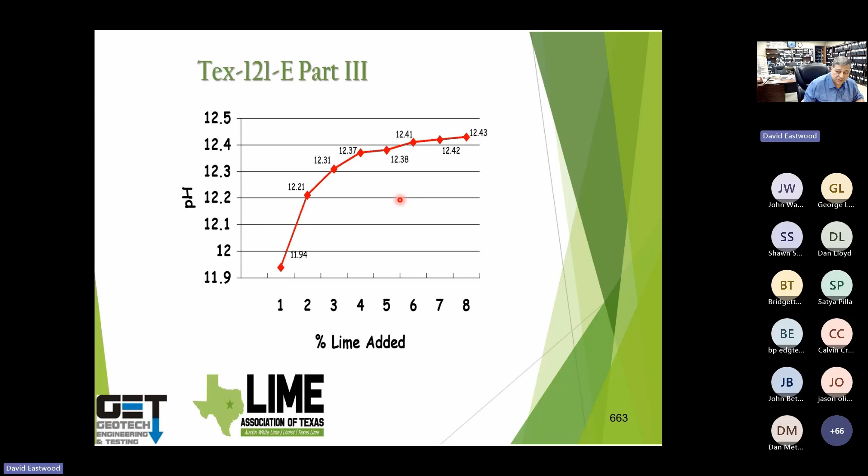If your soils are sandy, use lime fly ash. Use a type B. Lime fly ash could be type C or F. And compact within 2 hours, no more than 6 hours after adding and mixing the last stabilizing agent. You don't let it cure. You add the cement or lime in there.

Cement or fly ash in it and compact right away. So first you lime stabilize the sandy soils, dry it up, bring in your fly ash or cement, then add water if you need to, pulverize it, and compact within 2 hours, and no more than 6 hours after adding the fly ash.

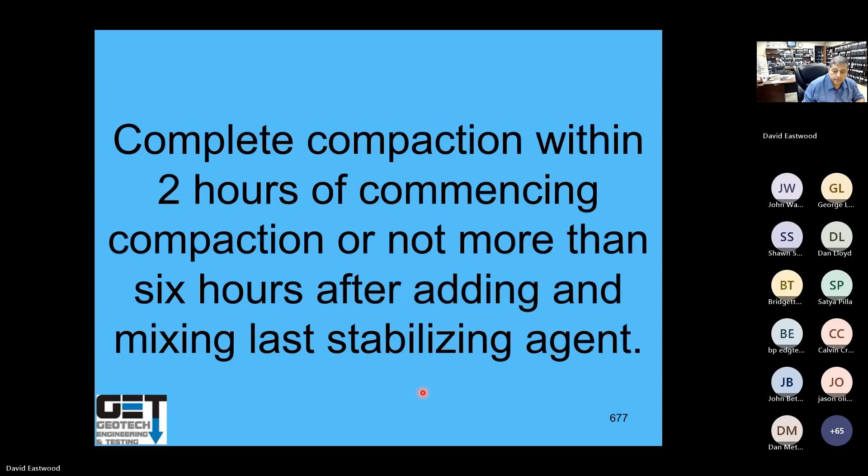if you have high levels of sulfate, you got to test for it. And if you got high sulfate, you cannot do lime stabilization or lime fly ash stabilization. So typically, the sulfate-induced heave occurs in clays. If your pH is greater than 10.5, usually soluble sulfate is really more than 8,000, and moisture is present. And the clays mixed with the lime or cement, pH is increased from natural values of 7.8 to about 12.

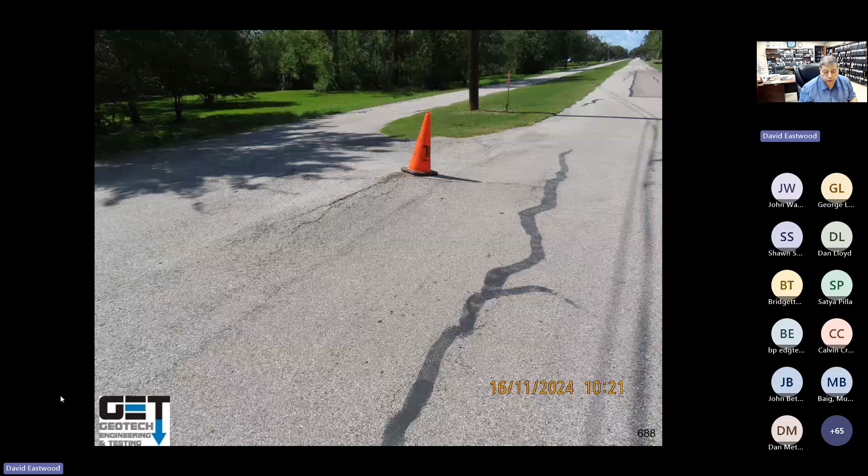Sulfate-induced heave can occur. This is some asphalt paving that are going through sulfate heave. That's in Friendswood, near Houston, which is roadways all heaved up and cracked up. These are sulfate-induced. These are soils that got sulfate in them.

So if soluble sulfate level is less than 3,000 parts per million, you got low risk, you don't have to do anything. Between 3,000 and 5,000, you got moderate risk, excess water must be added. Soil got to be compacted 3% above the optimum. The initial mixing should be conducted at moisture content 3 to 5% above optimum.

If your sulfate is between 5,000 and 8,000 parts per million, you got moderate to high risk of sulfate heave. Excess water must be added during the mixing. Water should be used up to 5% above optimum for compaction. In addition, sufficient mellowing time of 6 days should be allowed before final mixing.

If your sulfate is above 8,000 parts per million, you don't do any kind of lime stabilization or cement stabilization. So you're going to have to dig out that soil, bring in soils that don't have sulfate in it, then you can stabilize it, or you don't stabilize it at all. I was in Fort Worth a few months ago. They had a huge building out there, and none of the paving had any stabilization. They just compacted it and put concrete on top of it. So they didn't do any stabilization because of the high sulfate.

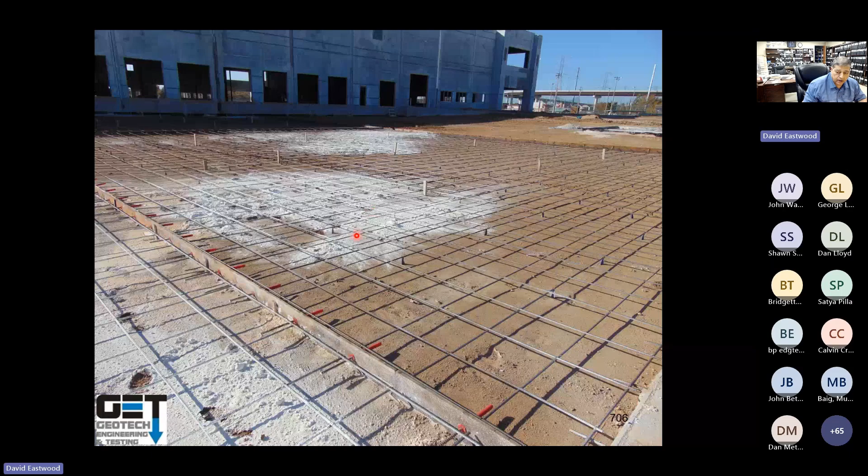Concrete placement: you compact the soil subgrade, set your forms in, get your dowels in, make sure they're all straight, and put in your expansion joints. We like expansion joints about 80 feet apart. Put chairs under your dowels, and if you have a wet area, add some lime to dry it up.

Start pouring the concrete with your laser screed coming in, finishing it. Make sure your concrete slump doesn't exceed 4 inches. Vibrate the concrete as you're pouring it in, and pour in pour strips to allow for shrinkage.

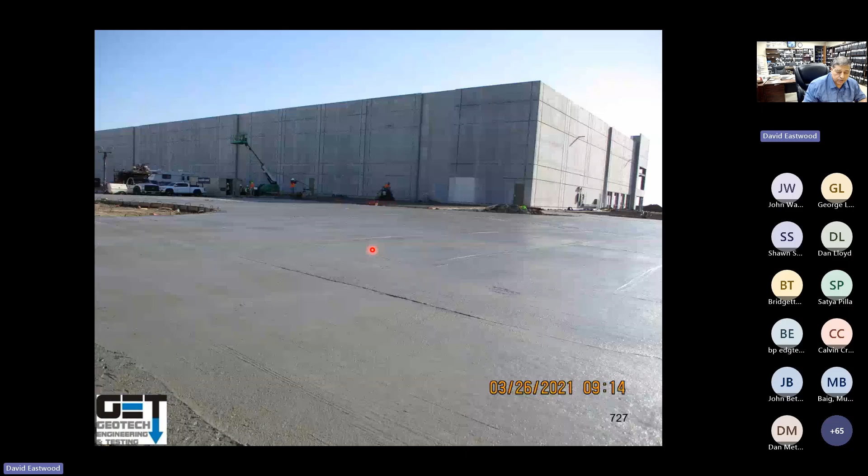Go in and put control joints in within 6 to 18 hours after the pour. Trowel it, then start saw cutting. Put control joints in at 15-foot spacing, not 20-foot spacing. These joints tell the concrete where to crack, and spacing should not exceed 15 feet, otherwise you'll get cracks if the control joints are too far apart. That's how you get nice parking lots.

The thickness of this concrete depends on the traffic loading. Typically about 8-inch concrete for parking lots, with a minimum concrete pavement thickness of 6 to 8 inches.

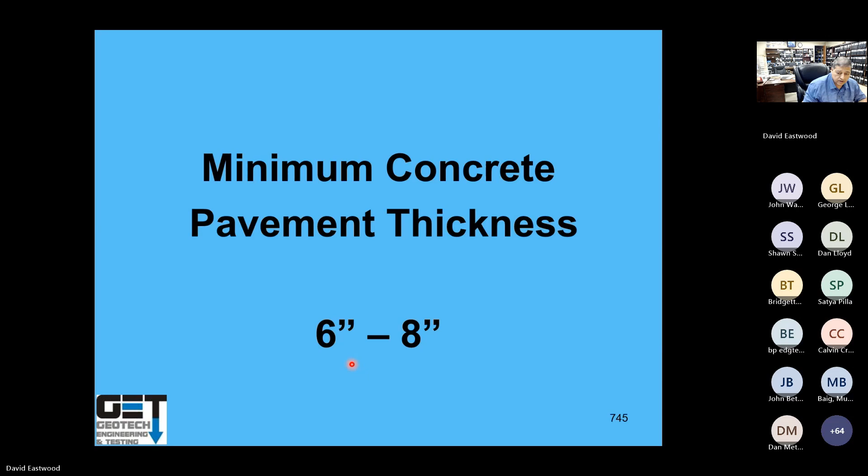Loading ramps: you're going to have some loading ramps there. You have to design them for bearing capacity and lateral pressures, and make sure all the soils underneath are compacted to 95% standard Proctor density, accounting for soil backfill type and compaction.

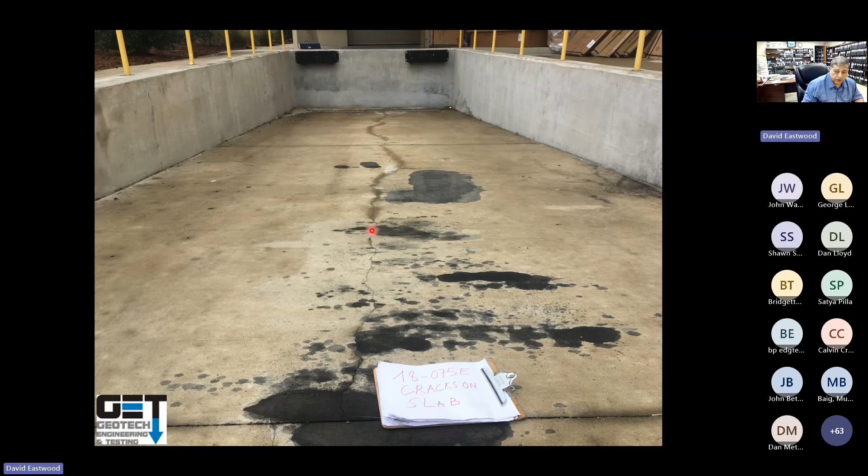Truck wells: you excavate and the trucks go down in. Here you have to worry about soft soils and groundwater. When you pour the concrete, make sure you have joints in it, otherwise it will crack a lot. You want joint spacing, control joints, of about 15 feet. For truck wells, you need bearing capacity, lateral pressures, dewatering recommendations, and compaction at 95% standard Proctor density. If you have a shallow or perched water table, account for that too.